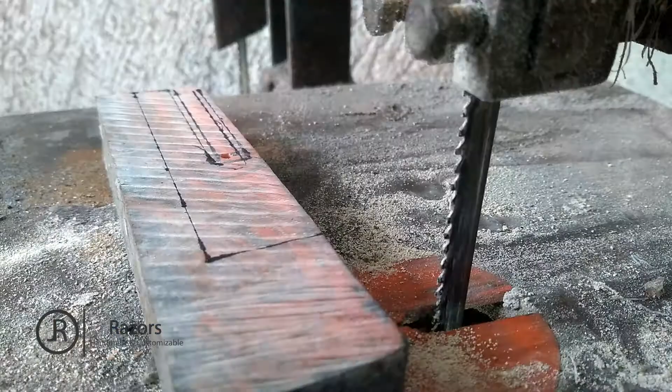So I picked this handle material. It's not traditional, I know. If that triggers you, I'm sorry. Welcome to Jacob Rake Razors. I like to do things the way I like to do things.

This is a polyester lava, I believe it's called. The reason I chose polyester instead of wood, which would, pun intended, have been traditional, is because chef's knives get really wet often, and I don't understand why you'd want something that collects water. In 100 years you're going to have a tang that's so rusted out you have to start over. So I typically try to go for longevity when building anything, especially knives. This way you have a piece of plastic that does not absorb any moisture under any circumstances, whether you're washing it or whatever. It doesn't matter. This is, in my opinion, the better alternative, and I feel like those who made knives 1,000 years ago, had they had this, would have used it—not just because it's beautiful, but because of that.

So this is actually going to be a cage style hidden tang. It's not going to be your standard hidden tang. I think it's prettier, to be honest with you, and also it's pretty easy.

So you can see I'm just marking it right there, using a regular pen. Actually, I have this really awesome pen, it's not even a Sharpie, it's just one of those cool ballpoints. I don't know the brand, but it definitely works better than anything I've found. It doesn't clog up like Sharpies.

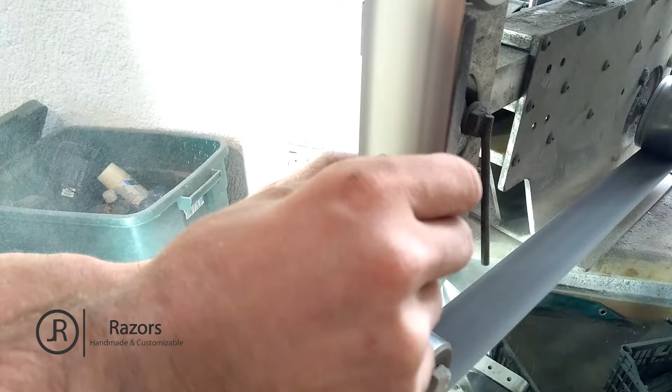So anyways, once you get that marked out, you've got to make sure everything's smooth and flat, that way when you put it back together you don't have gaps. You don't need a surface grinder to do this, you just need some practice. This basically is a surface grinder, just using your hands.

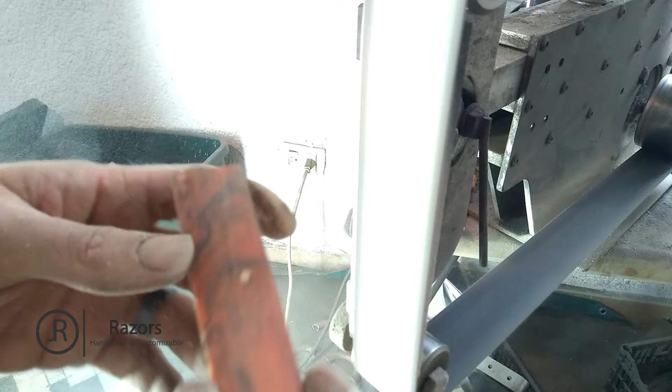Sped up again. I'm using a 1/8 inch drill bit as a testing pin because the hole is 1/8 inch, so obviously it's going to fit. Eventually the pin will be able to come out.

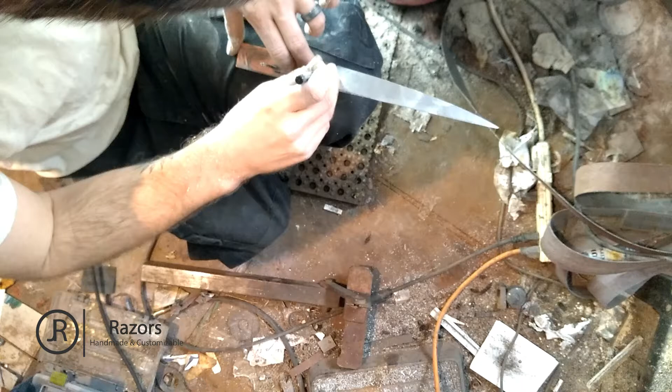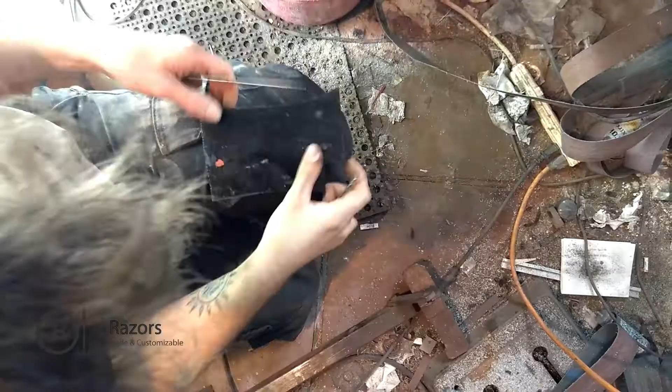That's something I find super important when it comes to chef knives. You want to be able to disassemble the entirety of the blade so you can clean, oil, and put it all back together multiple times, just in case it does get totally submerged in water, which of course it would—it's a chef knife.

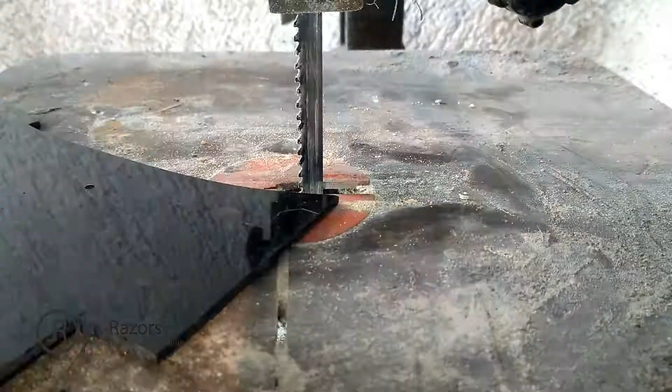But here we go, working on the cage part. So what I did is I picked another piece of acrylic, same reasons as before. I picked black though because I thought it'd look really cool. What I'm going to do is make the cage that separates the two scales—I'm sure that's not the correct word, but that separates the scales.

And this is going to basically hold the blade in, so it kind of has to be perfect. You see me test fit it—no, that doesn't work. Okay, perfect. Now we're going to test fit it again. Just using the bandsaw, quick and dirty way to do it.

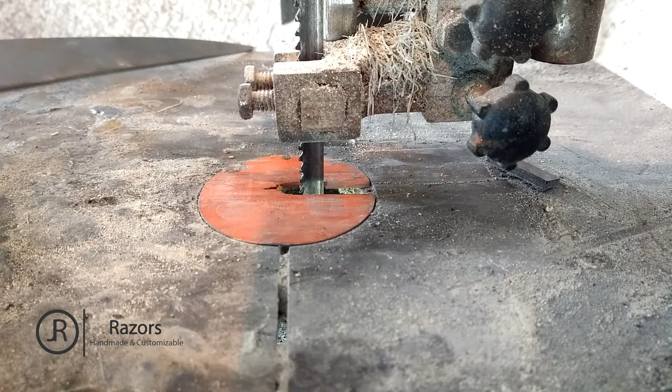So it didn't quite fit. I know what I need to do—fix that. Try it again. Nope, didn't work. Try it again. It's just the magic of continuously testing your work. If it doesn't fit, just make it fit, and if you go too far, start over, no big deal. So it's time to cut out the cage.

Pretty simple stuff, this is really easy material to work with. I really like it. Great camera work here. Pro cameraman.

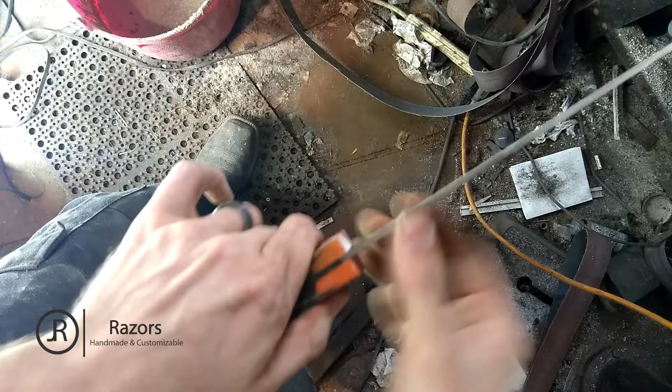One pin holding it together will suffice, although there's a possibility I might add a second one. We'll see, not really sure yet. That'll be for part 2. So anyways, the cage slides right up in, fits perfectly. Great, awesome, nice and sturdy.

So I'm going to make everything smooth, make sure there's no random pieces sticking out. It's pretty basic, the shape isn't what I want, so this is when we start shaping the handle. I haven't glued anything yet, which is why you see the clamp on there. Gluing will come later once I'm 100% confident in the design, because there's still a couple pieces I have to add, and you'll see that later in the video.

Pickiness, I'm a picky little guy here. All right, so I wanted to get that 45-degree angle in there, kind of like that. To me, that's the thing that makes a Japanese style knife stand out from a European style knife.

So yeah, eventually I'll cut it off and add a piece in there. I guess a bolster, but it's not really a bolster, just an extra piece. Doesn't protect you from anything.

Okay, what are you doing, Past J? Also, you'll notice I'm using that belt to the end of its life, getting the most out of it. Okay, so now we have that gap between the top of the knife and the bottom.

I need to make a little tiny piece to fit in there. It also looks good and kind of adds some rigidity to the knife, so I just liked it. I don't know, a lot of the times when I do stuff, it's not like a traditional thing, it's just something that I liked.

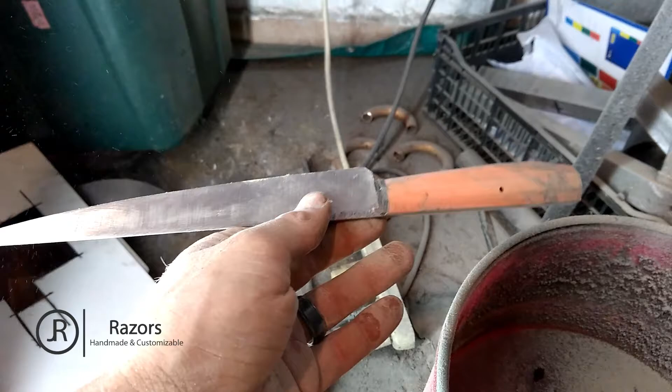So you can see it kind of looks like a katana, but I'm actually going to get rid of it. And it's all gone, see, just ground it off real quick. And it has this nice look. Once it's polished up, you'll see the black from the cage extended right up there.